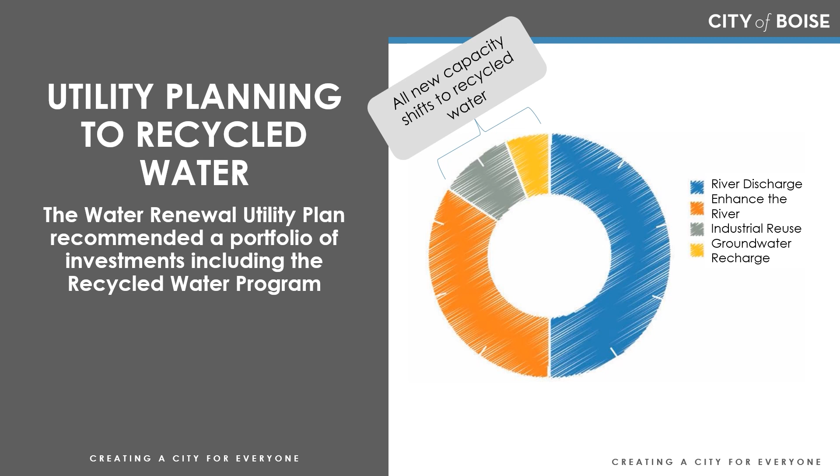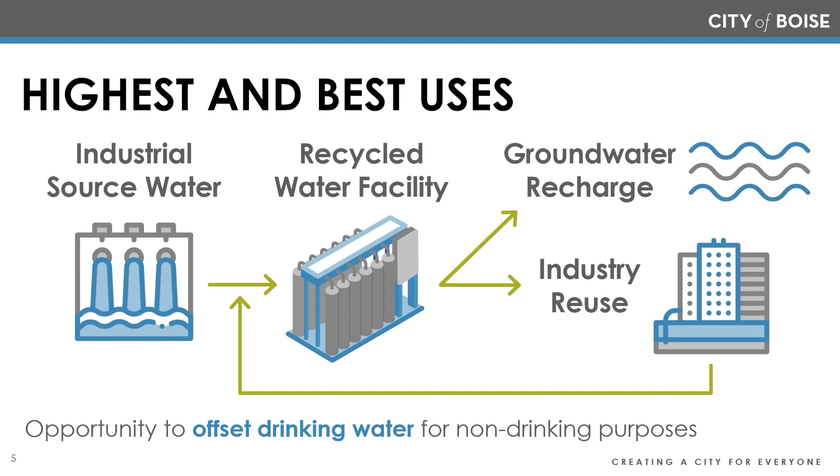So how will we use recycled water, or what will the Recycled Water Program use the water for? We prioritize the end uses based on our highest and best use policy. Currently, we take industrial source water, which will flow to the recycled water facility. We'll purify the water, and then the two current prioritized end uses are groundwater recharge and industry reuse. There's also opportunities that could be in the future for irrigation or other uses, but currently those are the two highest prioritized end uses we are pursuing.

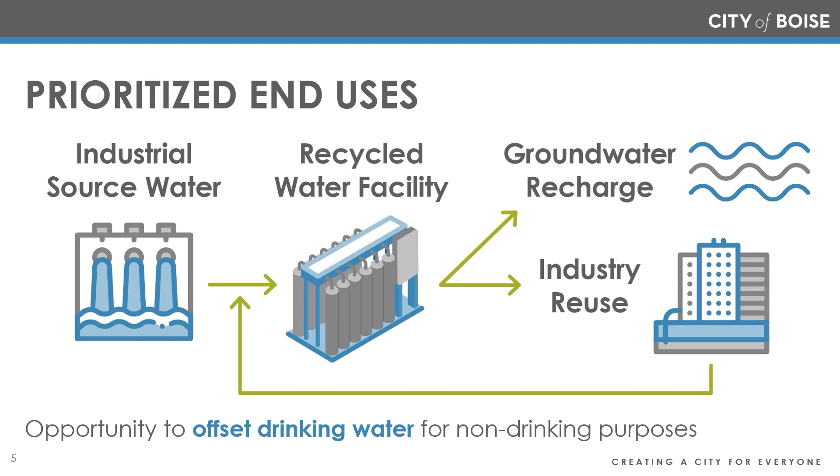For our progress report, we had our second National Water Research Institute panel of experts, where we brought in water experts from all around the country. Most were in person and a few online, and we were able to present to the panel about the Recycled Water Program, all the work we have done and the work we're planning to do in the coming years, and get feedback from the panel on topics like groundwater recharge, treatment technology, and different parts of the program. That presentation is on YouTube or online if you wanted to watch how the panel went.

We're currently working on getting a report back from the panel, which will be publicized as a public document, where we answer questions from the panel, they answer our questions, and there are some public questions as well that we'll answer in the final report. That should be ready April or May of this year.

What's coming up next in a few months? We have continued to conduct the site characterization and groundwater modeling, so we'll continue to collect water samples and geological, hydrogeological, and geochemical information. We'll start to design the future recycled water facility, deciding what treatment technology we'll use and how to size it. And then we'll continue to run the pilot through the summer until fall for community engagement and community tours, to continue to inform the public on the Recycled Water Program. So those are some of the things we'll continue to work on over the next few months and year.

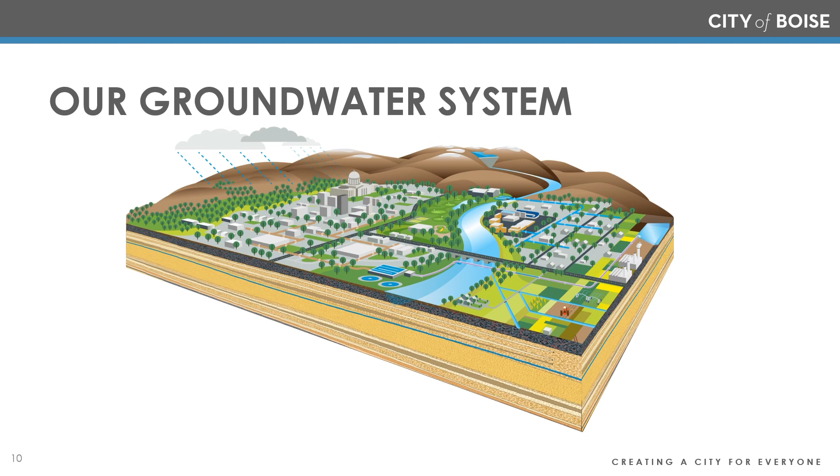And then, managed groundwater recharge: along with the river and infiltration that takes place in the valley, for groundwater recharge there are really two methods. One is a recharge well, also called injection, and the other is an infiltration basin, where water naturally percolates through the soil and into the ground. With the recharge well or injection, you basically put the water in a specific location.

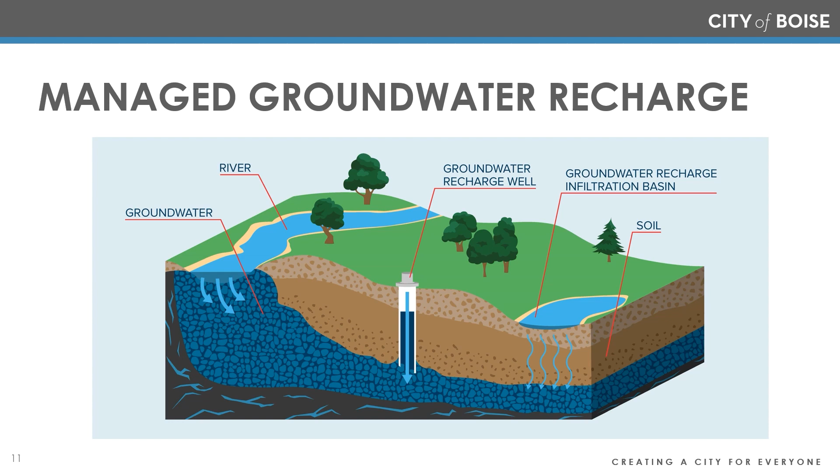On the right is a picture in California of a groundwater injection well. It basically looks like pipes that go into the ground, not a lot to it other than piping, valves, and flow meters. On the left, in Gilbert, Arizona, is an infiltration basin, which looks like a large pond where the water would naturally infiltrate into the ground. Those are the two options, two ways to do it, which we'll have to decide on for how Boise's recycled water program will put water in the ground.

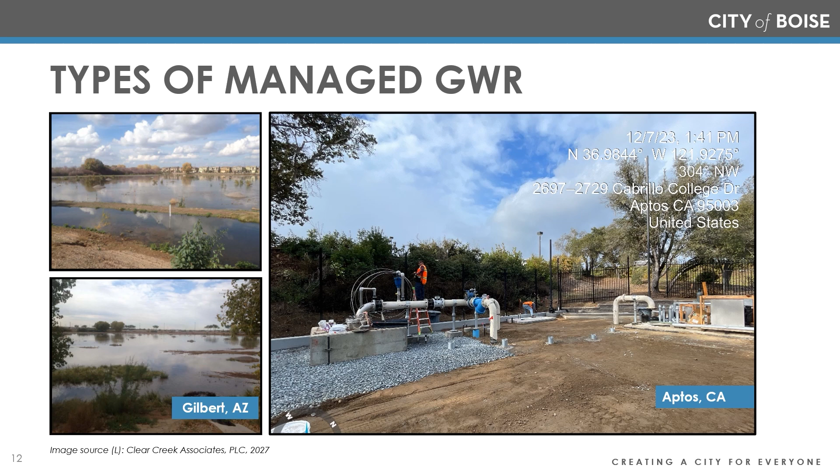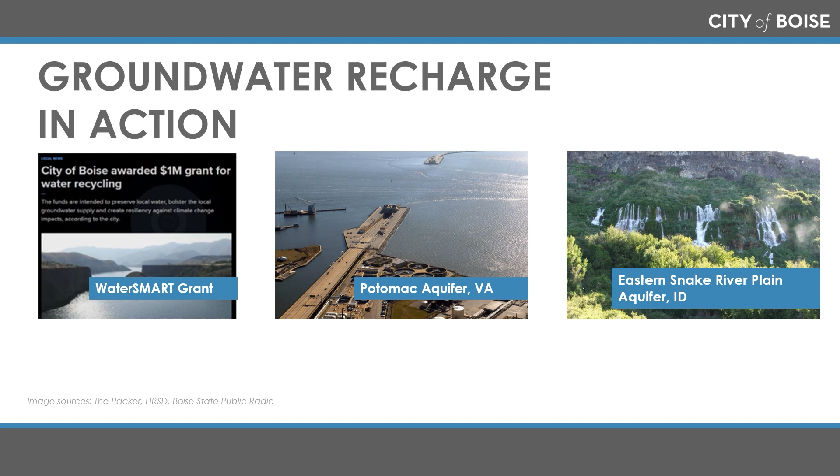A couple examples from around the country: the Potomac Aquifer in Virginia, where they do groundwater recharge for saltwater intrusion, and in Idaho, the Eastern Snake River Plain Aquifer, where they've been taking water from the Snake River and infiltrating it through the basalt to replenish groundwater in the eastern side of the state. We also wanted to mention the United States Bureau of Reclamation, from whom we received a WaterSMART grant of $1 million for planning. We mention this because many municipalities, states, and cities are pursuing recycled water or water reuse. It's becoming very popular throughout the country, as cities plan to secure their water future.

Two of our goals for the groundwater recharge piece of the program: one is to increase groundwater quantity, and the second is to maintain or enhance groundwater quality.

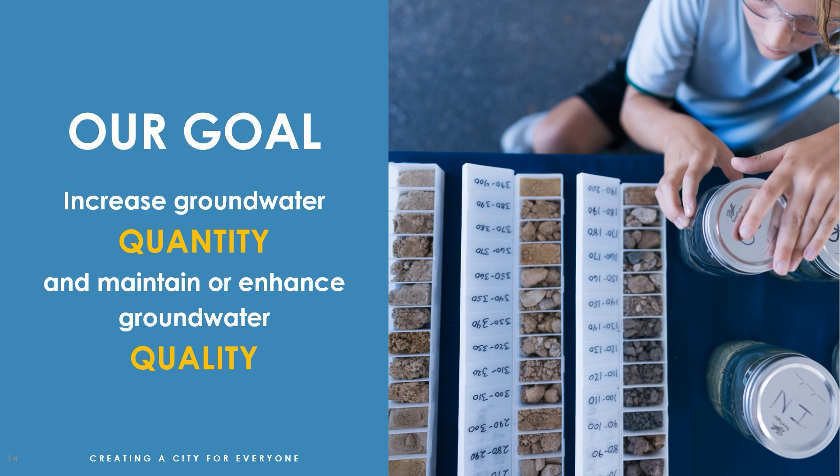Groundwater recharge, how will it benefit the Boise community? The first benefit is keeping water local, through resource recovery and reuse, by taking the purified water and injecting or infiltrating it into the ground. We're able to keep the purified water in Boise, whereas now we treat the water at the water renewal facilities and it goes into the Boise River or downstream to other communities. So the recycled water program and groundwater recharge allows us to keep the water local, as you can see from the graphic we developed.

The second benefit is maximizing investments for the greatest community benefit. Examples include economic development, as we create increased discharge capacity at Lander and West. There are many pieces to that, but part of it is the recycled water program, which as the community grows is a good way to plan for future water use. Groundwater recharge produces a consistent, year-round location for the purified water, so essentially we create a new water supply for Boise.

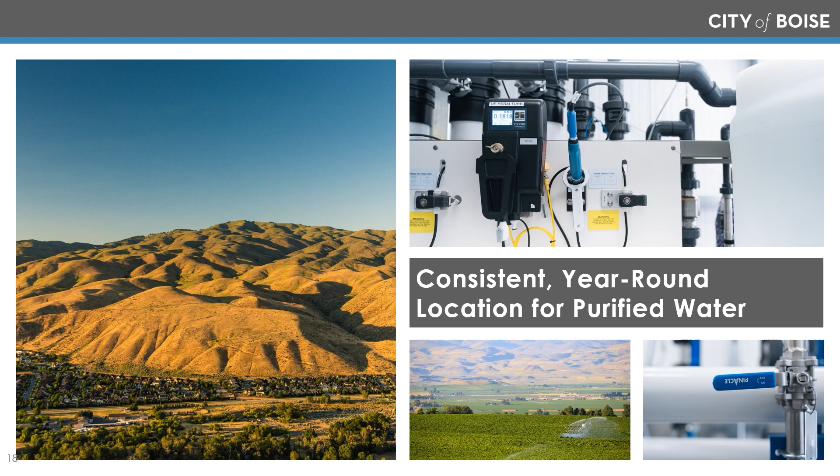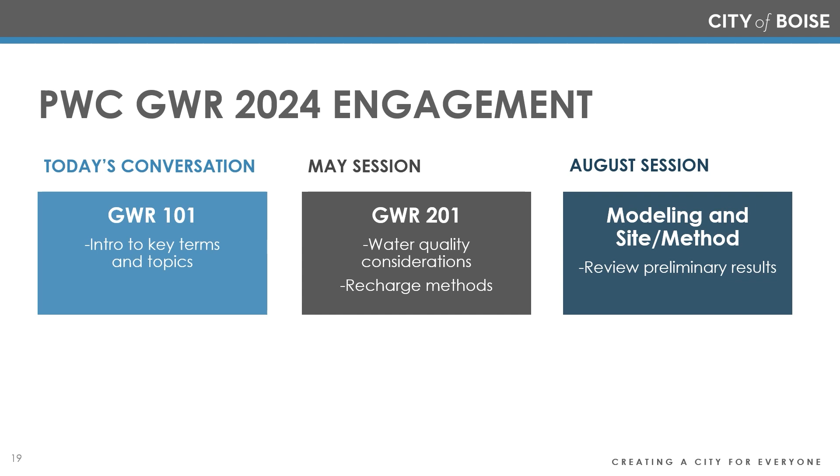Looking ahead, we'll do Groundwater Recharge 101 today, introducing key terms and topics. In May, we'll do Groundwater Recharge 201, going over water quality considerations and recharge methods. In August, we'll go over modeling and site methods and review preliminary results. That's the current plan, which will be edited based on how much work we can get done prior to those sessions.

Groundwater Recharge 101 - some of the overview questions we're hoping to answer today: What is the groundwater recharge regulatory environment? What work are we doing to build a program that is protective of our community and existing groundwater users? And we'll go over site characterization and groundwater modeling.

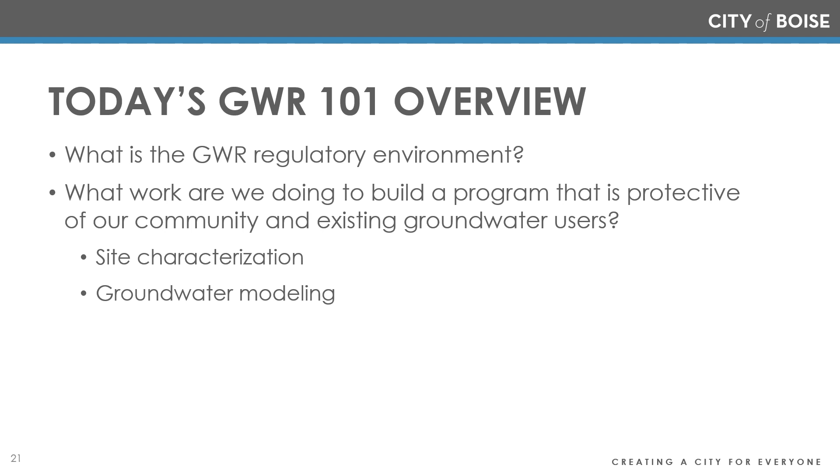Three decisions we need to make are: first, where will we recharge the groundwater? Second, what water quality will we achieve? And third, how will we recharge the groundwater? So, where, what, and how.

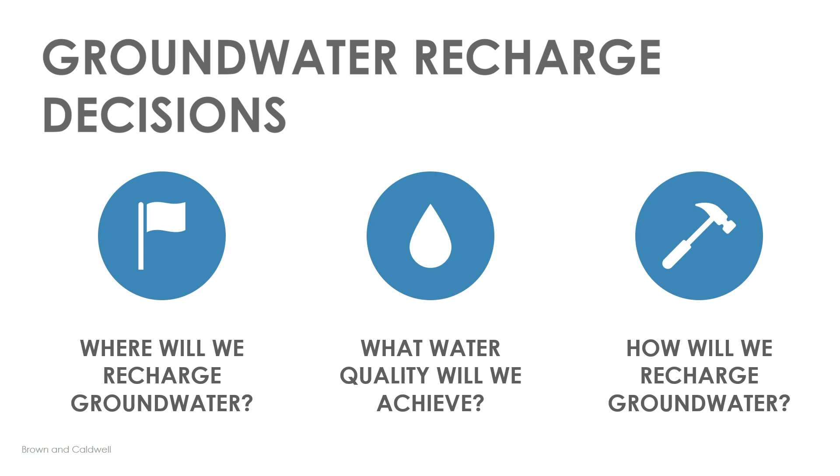Currently we're looking at two locations, which we've highlighted in the past, called Site A and Site B. Site A has two wells, and Site B has one well. We're doing site characterization work on both sites. Site B is the location we recently purchased for the recycled water facility, so whether we can do groundwater recharge on the same site, or if we have to use Site A, or both, are all three options we have.

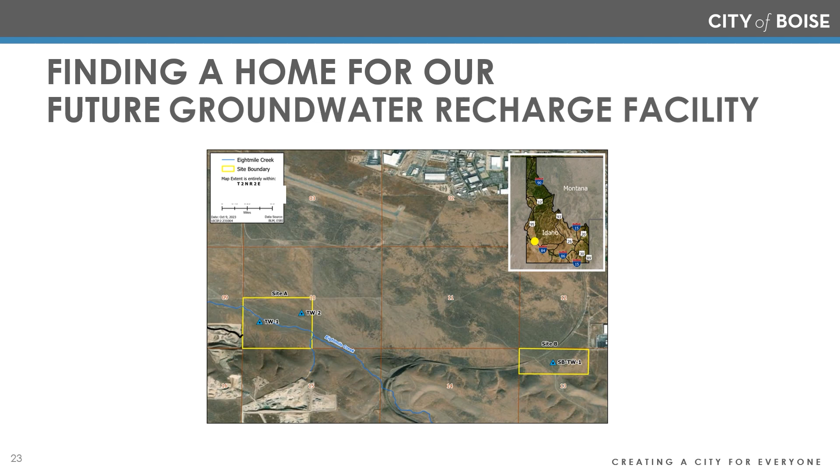Groundwater system analysis involves geological testing, hydrogeological testing, and geochemical testing and modeling. At Site A and Site B, these are the three areas where we're gathering data and information to make decisions in the future.

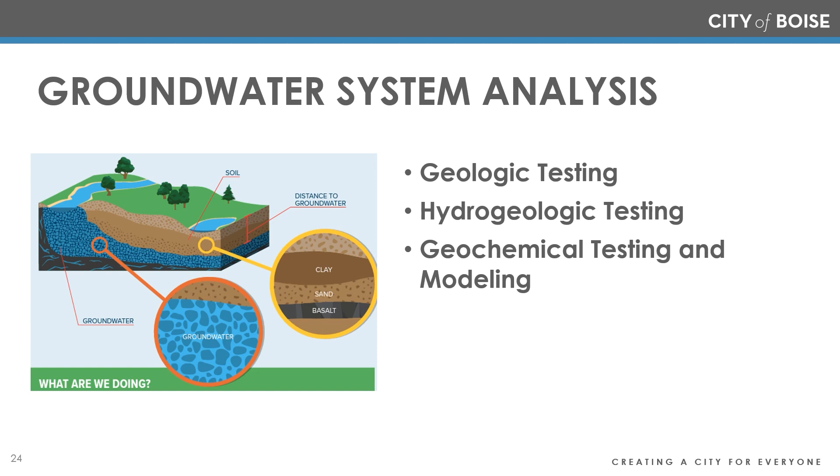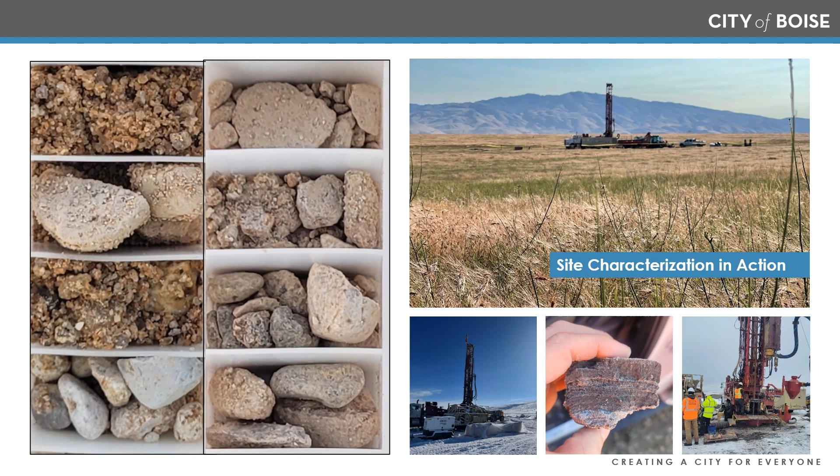Site characterization in action: the top right is Site A, and Site B in the wintertime, where you can see the drill rigs. On the left is the actual geological characteristics for the site. Every 5 feet we take a sample and collect it so we know the geological characteristics at every 5 feet. That's what the geological piece is - we basically take samples that can be used for future testing.

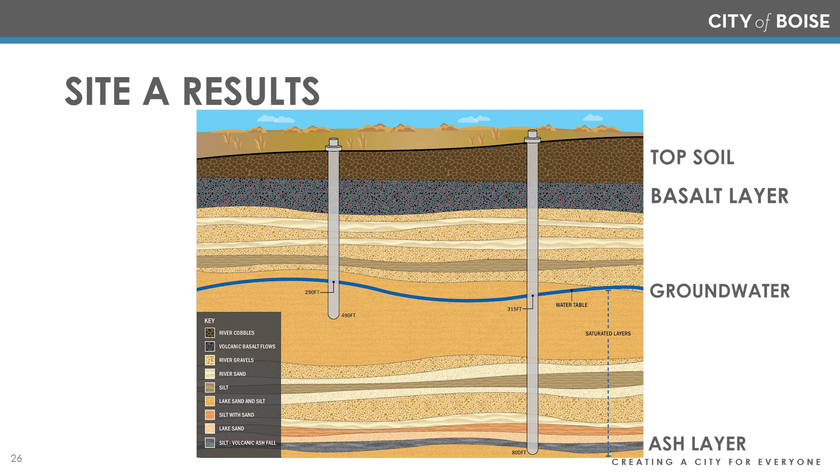This graphic is one that I like. It's got a lot of detail, which is hard to see and define, but the key outlines the different layers in the lithology for Site A. It's not exact, but it's pretty close to what you'd actually find there - topsoil, a basalt layer, and at 800 feet an ash layer, which I'll mention in a minute. You can see where the groundwater, the blue line, starts, which is about 300 feet. There are also two well depths: one well to 800 feet, and one to about 500 or 600 feet. That's representative of Site A.

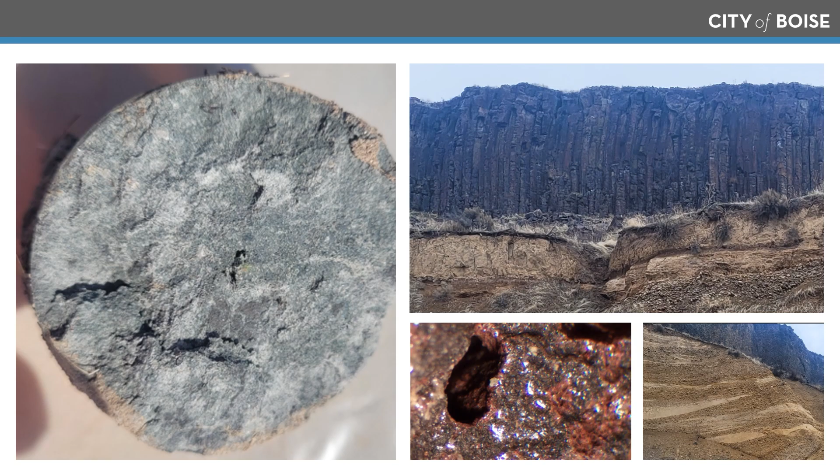The reddish picture is what the basalt looks like up close. On the left is an ash layer, I think from around 800 feet. We sent that off to Boise State University, where they're going to do an isotope analysis to determine the age or timing of that ash layer. So that's something we were able to coordinate with Boise State.

Does it head south to the Snake River? Does it go north to the Boise River, east or west? How fast does it move? At what rate, and where does it go? So a lot of those things with that model, but it should be able to tell us all of those different things.

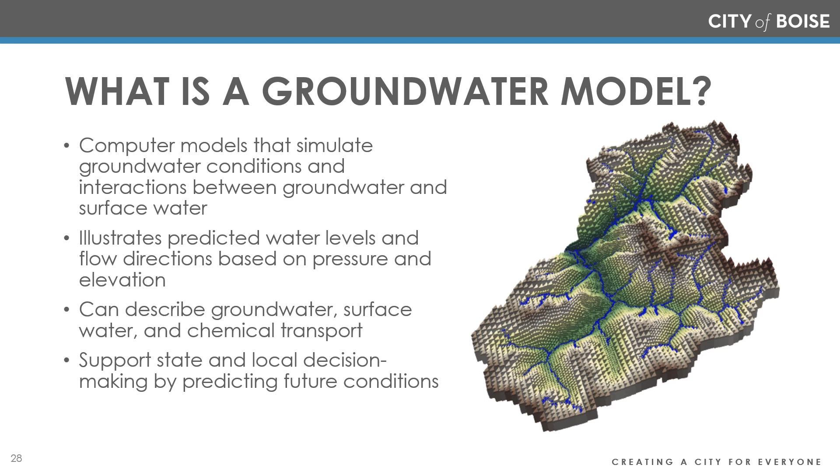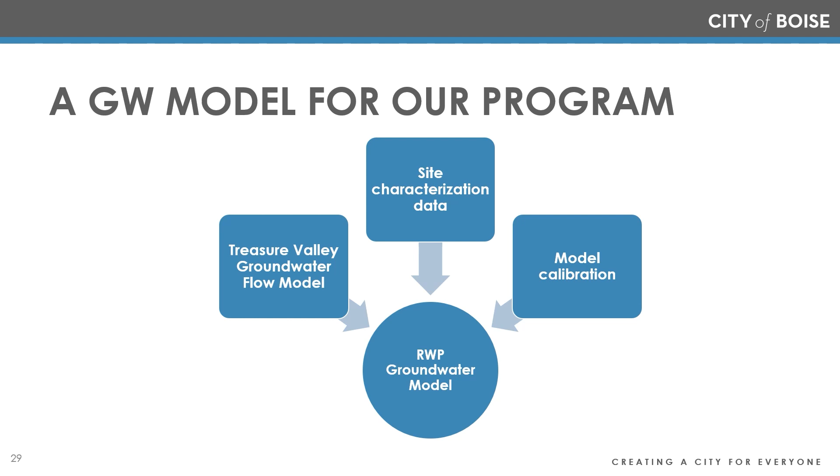The three pieces of the groundwater model are site characterization data, so the data from Site A and Site B, the model calibration—so the modelers will use the USGS model to calibrate, using well information from area wells and different water quality information—and then the third piece is that Treasure Valley groundwater flow model. So we take those three pieces, put them together, and we'll get our recycled water program groundwater model.

Both Idaho Department of Environmental Quality and Idaho Department of Water Resources are basically joint regulators. There's a water reuse permit and an underground injection control permit that comes from Idaho Department of Water Resources. The regulations vary depending on the method, the source, and use, so it's almost on a case-by-case basis that you work with the regulators on your permits for the program.

As a minimum, the requirements include maintaining the groundwater quality. So as we start to get water samples back, and we can look to see what is in the groundwater on Site A and Site B, that gives us a good baseline to know that we need to at least meet those water quality requirements at a minimum.

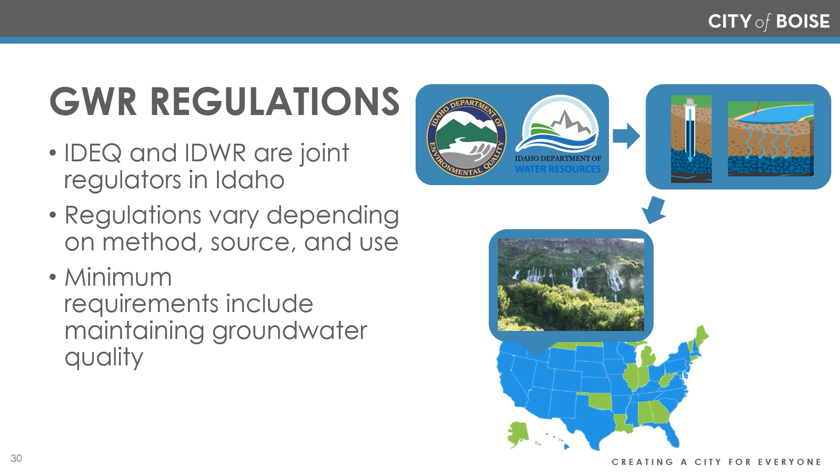So water quality considerations: the quality of purified water the city recharges impacts the quality of the water already in the ground. This is where we have one of our goals, to enhance or improve the water quality. The recycled water program studies include considerations around how the purified water will interact with soils and minerals already in the ground. That's the geochemical testing, which we'll talk about in future meetings—a lot there, and a very interesting topic.

It's about how the recycled or purified water interacts with the Site A and Site B geological and hydrogeological characteristics. And the groundwater recharge program's purified water will be conditioned such that it maintains or potentially enhances the quality of the groundwater system. So three things to consider with water quality.

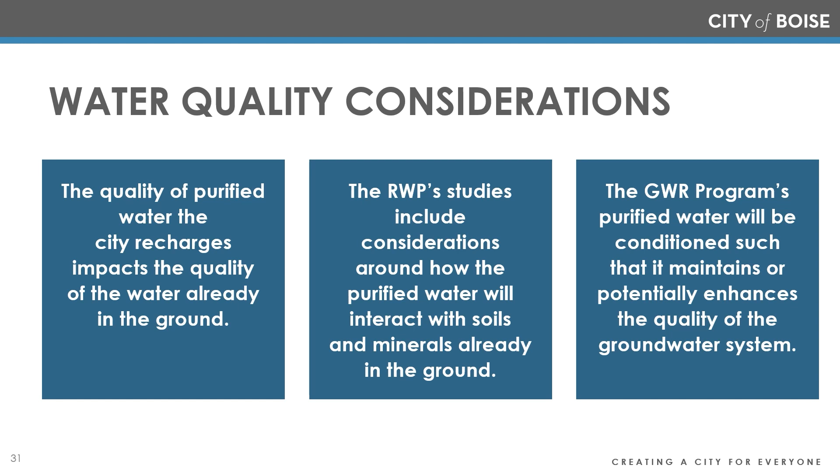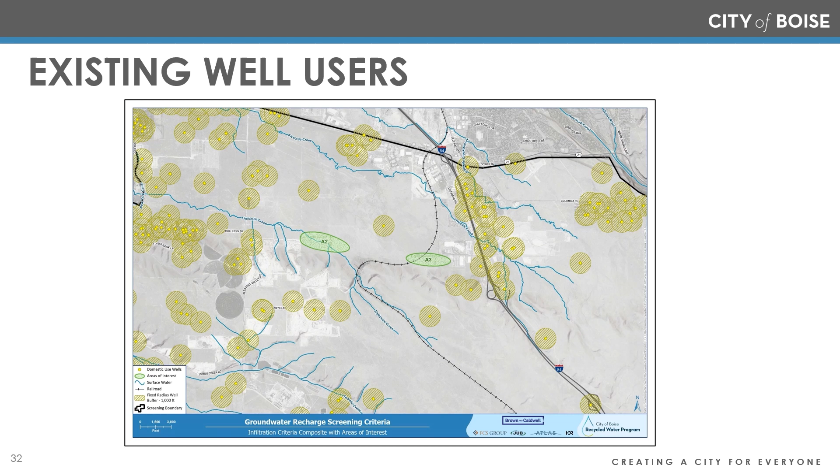We need to recognize the other well users in the area, where the existing wells are, and where we are in location to those wells. This goes to travel time, which refers to the amount of time it takes for the recharged water to travel from the point of recharge to another water user in the area. So if we inject the water on Site B, how long does it take for that water to travel to the nearest well or user in the area, which is something the model will help us calculate—either travel time in years or in location. So a couple of different ways to do it.

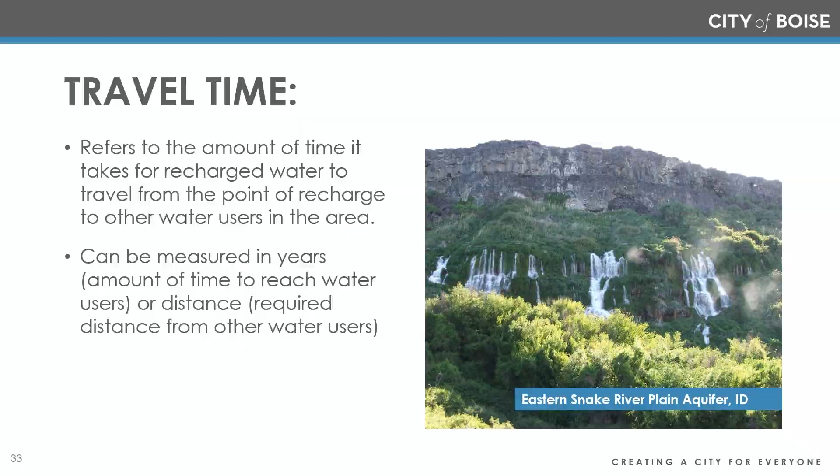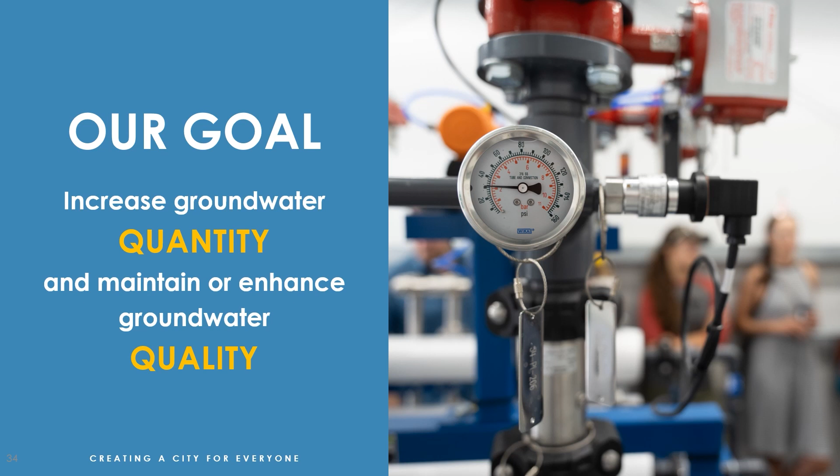We are really excited to work with the Public Works Commission on our recycled water program, and specifically the groundwater recharge work of the program. It's probably one of the more difficult pieces of the program we have moving—it's one that's hard to understand, and it's very important that we do it right. That's why we felt it's very valuable to work with the commission to get your ideas and opinions on groundwater recharge moving forward. Thank you.